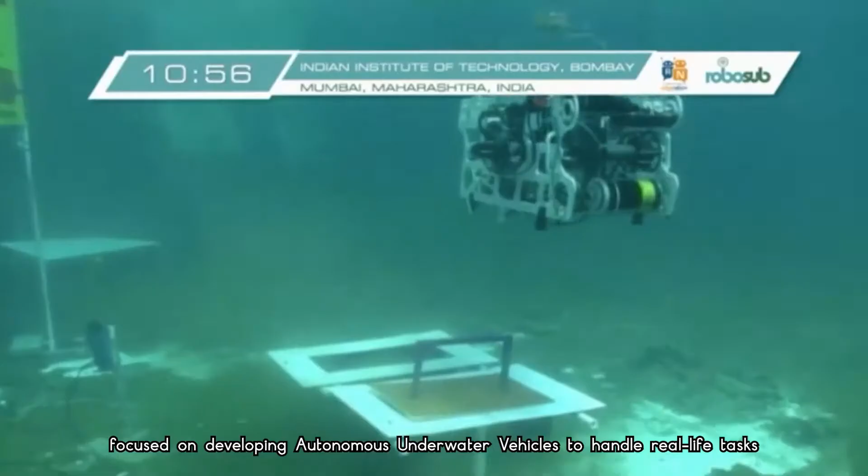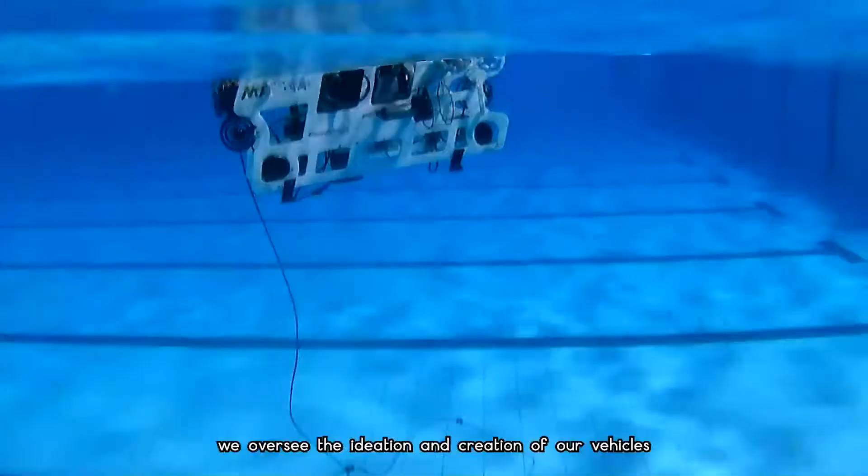AUV-IITB is a multidisciplinary team of 55 members focused on developing autonomous underwater vehicles to handle real life tasks. Through the consistent effort put in by members of our four subdivisions, we oversee the ideation and creation of our vehicles. Our flagship series is named Matsya, which is derived from the Sanskrit word for fish.

Hi, I am Sanjyoti Naran, a fourth year undergraduate from the Department of Electrical Engineering at IIT Bombay. I am the current team leader of AUV-IITB. Hi everyone, I'm Akshat Rajlat, a senior undergraduate student at the Department of Mechanical Engineering, IIT Bombay. I'm one of the current team leaders of Team AUV-IITB. Hi, I'm Mohan Abhyas, fourth year undergrad from Computer Science Department, and I'm one of the current team leaders.

Hi, I'm Nakul, a third year undergrad from Aerospace Department, and I am the Mechanical Subdivision Head. And this is the mechanical subdivision of the team. Hi, I'm Aditya, a third year undergrad from the Electrical Department, and I'm the Electrical Subdivision Head. And this is the Electrical Subdivision of the team. Hello, I am Andrew, a third year undergrad from the Electrical Engineering Department, and I am the Software Subdivision Head. And this is the software subdivision of the team.

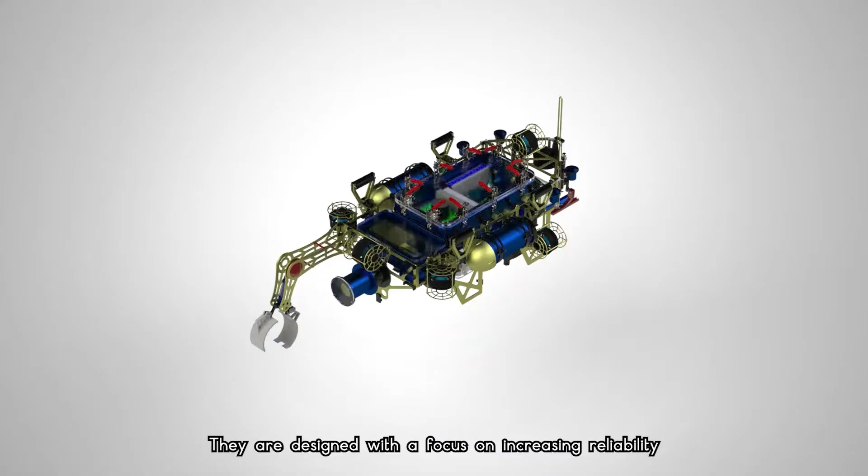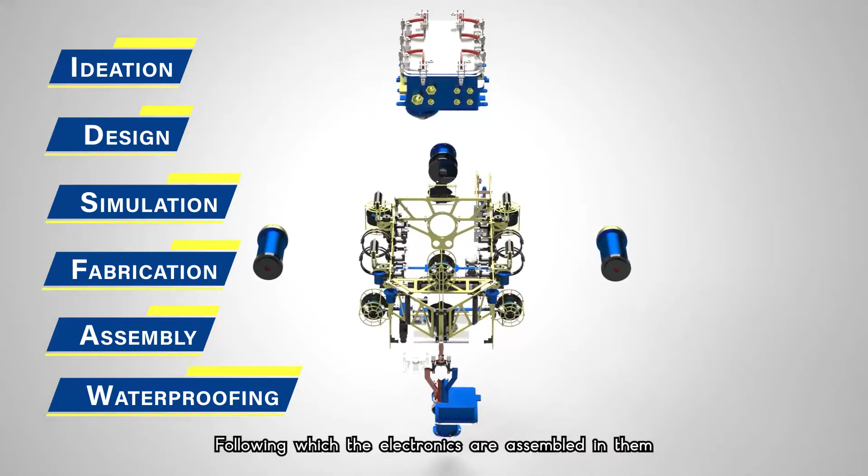Hulls are waterproof enclosures that house all the electronics, sensors, and other water sensitive components. They are designed with a focus on increasing reliability, modularity, compactness, and providing efficient heat dissipation. The making of a hull is a rigorous process consisting of ideation, design, simulation, fabrication, assembly, and final waterproofing, following which the electronics are assembled in them. We use a multi hull system with two types of hulls, namely cuboidal and cylindrical, for increasing accessibility and minimizing the chances of total system failure.

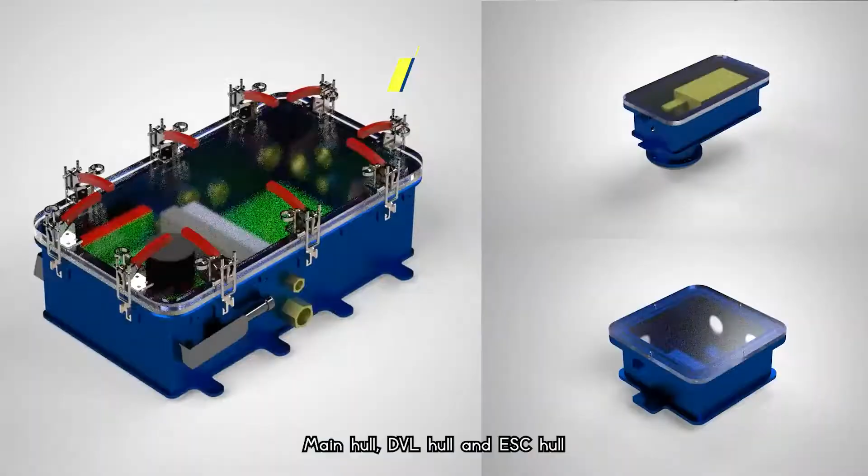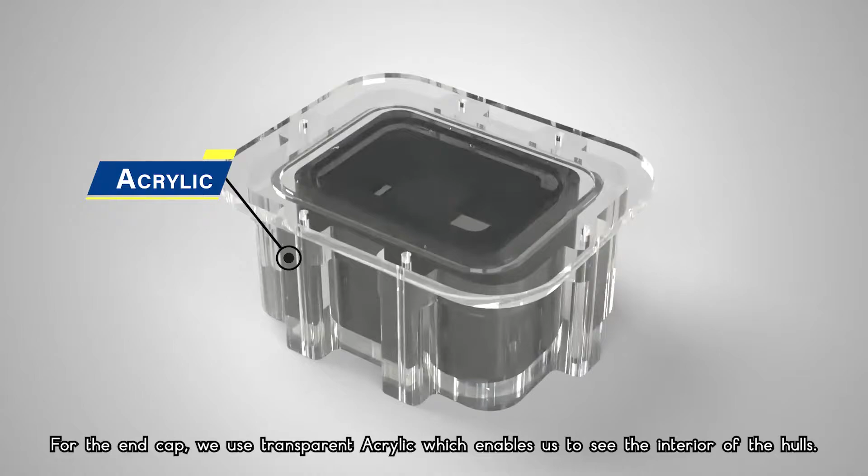In Matsya 6, we have three hulls which are cuboidal in shape: main hull, DVL hull, and ESC hull, and two hulls that are cylindrical in shape: battery hull and camera hull. Mostly we use aluminium alloys and acrylic to make the hulls. Aluminium 5052 is used for sidewall hulls as it has higher malleability, whereas aluminium 6061 is used for the base plate as it is much harder to deform permanently. The IMU hull is made purely out of acrylic. For the end cap, we use transparent acrylic, which enables us to see the interior of the hulls. For ensuring rugged waterproofing, all the hulls undergo vacuum impregnation, which is an industrial porosity sealing technique.

Let's start our journey with designing. When it comes to hull designing, noting down various requirements is the first thing to do. Requirements from mechanical viewpoint like stability, weight, depth rating, hydrodynamics, and from electrical perspective, modularity, accessibility of inner components, heat dissipation, ease of assembly are considered. Keeping in mind these requirements, we choose the shape of hull, following which a rough CAD is made.

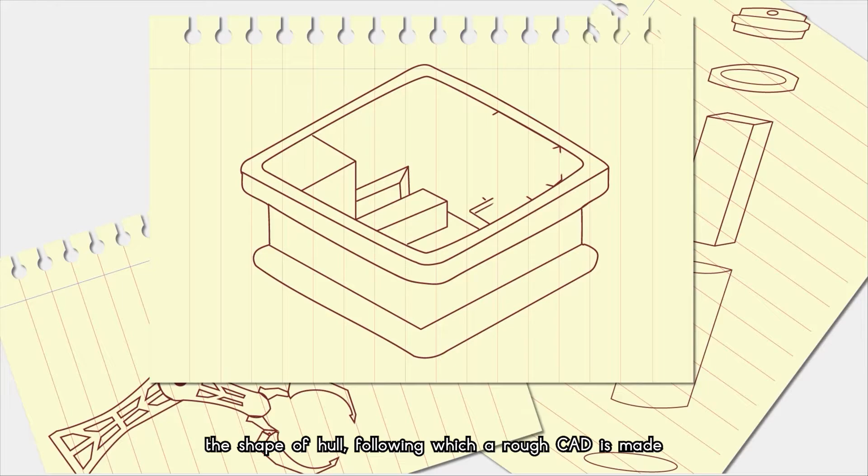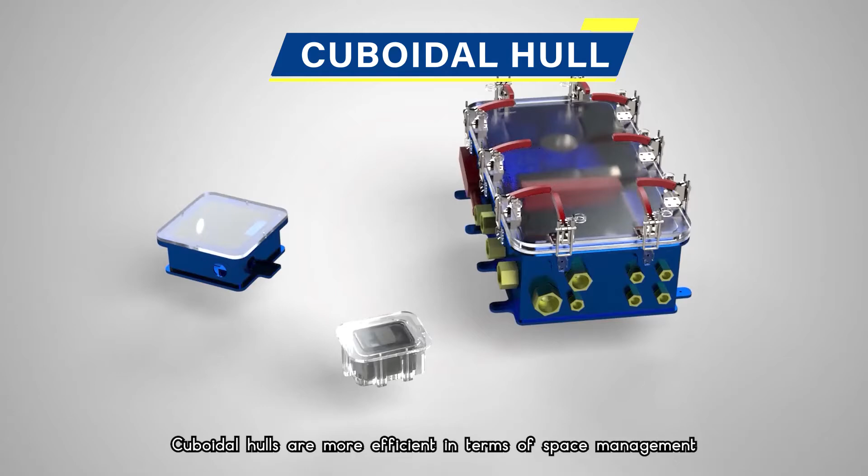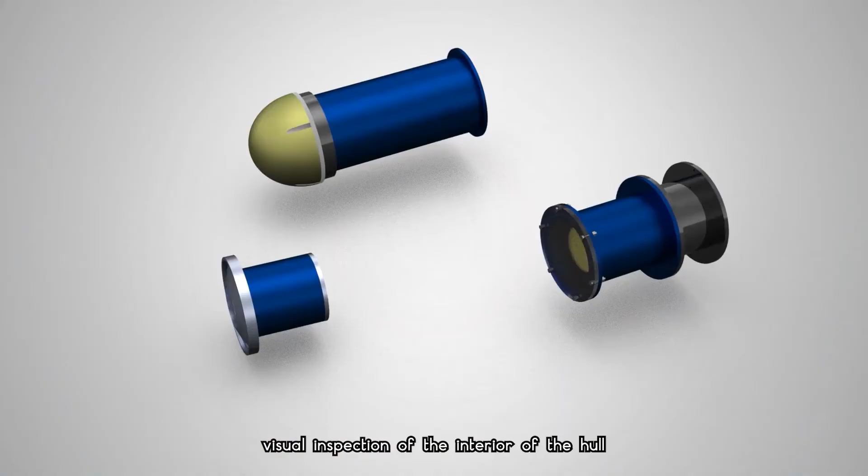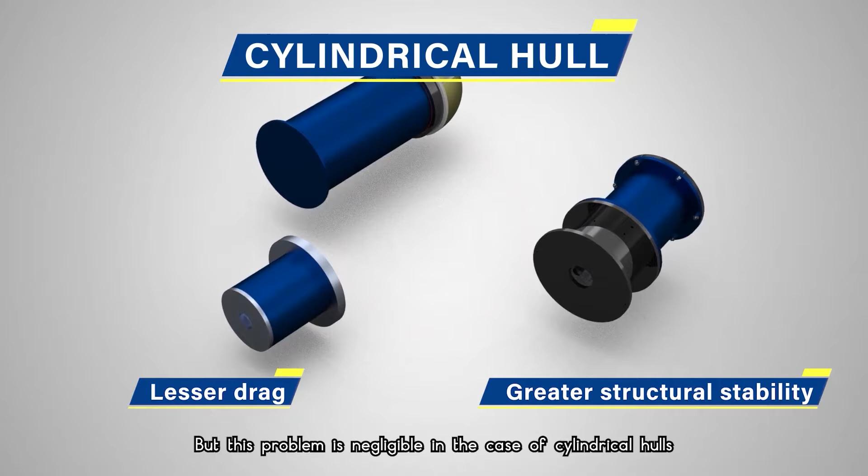We generally make hulls of two shapes, cuboidal and cylindrical. Both designs have their pros and cons. Cuboidal hulls are more efficient in terms of space management, offer a greater area to attach penetrators, and provide better heat dissipation. Moreover, we can also attach a transparent end cap to facilitate visual inspection of the interior of the hull. Cylindrical hulls, on the other hand, offer a lesser drag and have greater structural stability at higher depth. Cuboidal hulls may fail at edges and valves, but this problem is negligible in case of cylindrical hulls.

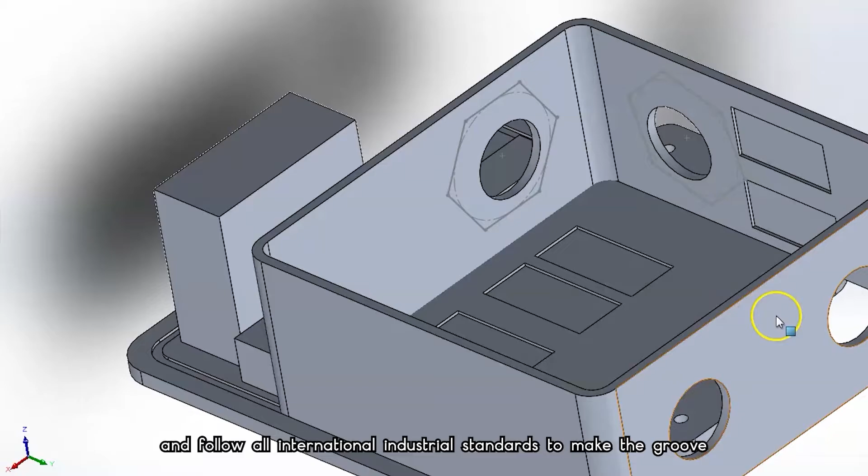Following designing, it's now time to make the CAD of the hull. After making a rough sketch, we move on to making a precise 3D model of the hull in SolidWorks. We use ISO 3601 certified O-rings and follow all international industrial standards to make the groove, thereby minimizing the chances of O-ring failure due to potential misalignment between the groove and the O-ring. Now we test the hull in the real world scenario by doing structural analysis.

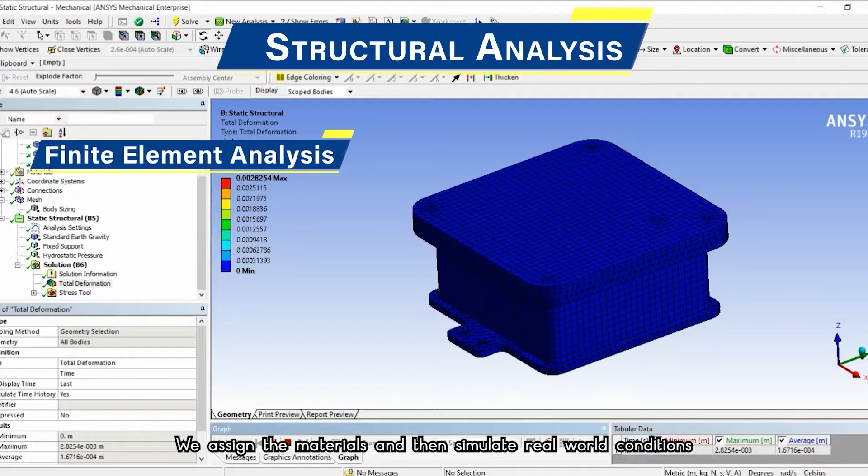Structural analysis. After CADing is completed, all the hulls are analyzed via the finite element analysis method in ANSYS. We assign the material and then simulate real world conditions. We then get the stress, the deformation, and the safety factor for the model. We ensure that the hulls have a safety factor greater than 1.5. If the safety factor is less than that, we find the cause of the failure and make necessary changes in the CAD, such as changing the thickness and adding supports until we achieve a satisfactory value. This ensures that the model does not fail in a high pressure condition.

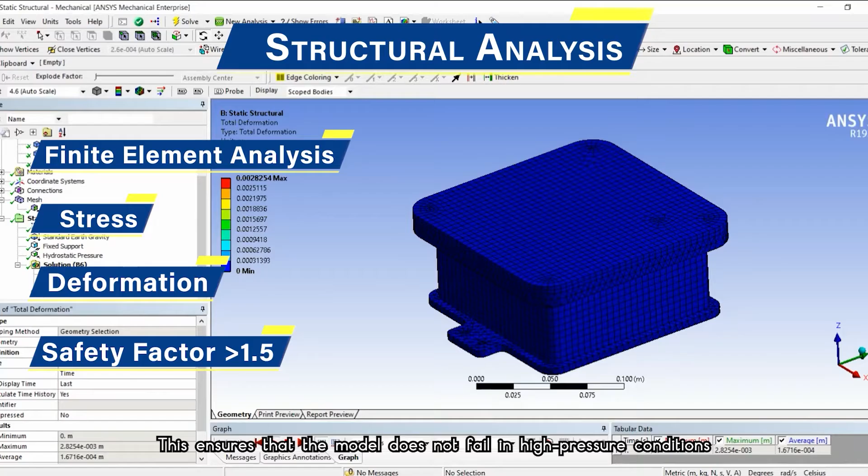All the hulls also undergo extensive linear buckling analysis in ANSYS to calculate the optimum thickness and the weight of the hull. Critical buckling load is calculated through load multiplier to ensure that our hulls don't deform severely or collapse. After examining individual hulls, drag analysis of the vehicle is done using ANSYS Fluent. Next up, we have CDR.

Once we are done with the analysis, an extensive critical design review of the CAD is conducted. In this, all our experienced peers in the team examine the CAD extensively for any shortcomings. If there are any issues, we reiterate the design by incorporating the necessary modifications. This process is inherently iterative, thus repeated until all requirements are met.

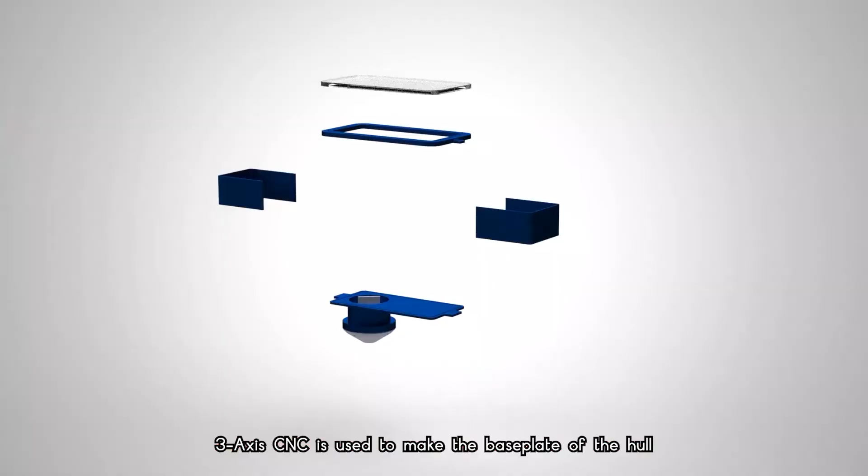And finally, we have the last stage, manufacturing. Once an iteration passes the CDR, we are ready for manufacturing. We use a variety of manufacturing methods to make the hull. 3-axis CNC is used to make the base plate of the hull. The side walls are manufactured by welding two C-shaped segments together. In case of cylindrical hulls, we directly procure annular cylinders of the required dimensions.

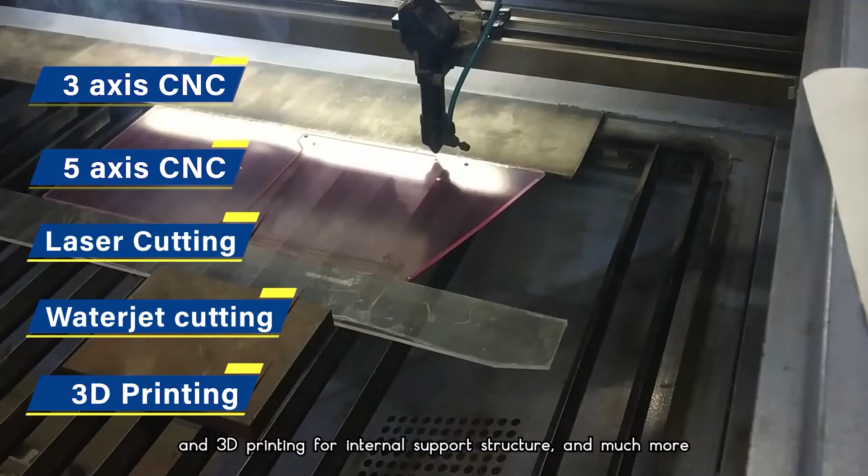We also use 5-axis CNC for making the flange and other complex parts. We use laser cutting and water jet cutting for making the frame and 3D printing for internal support structure and much more. Congratulations! Now you know everything to make your own hull.

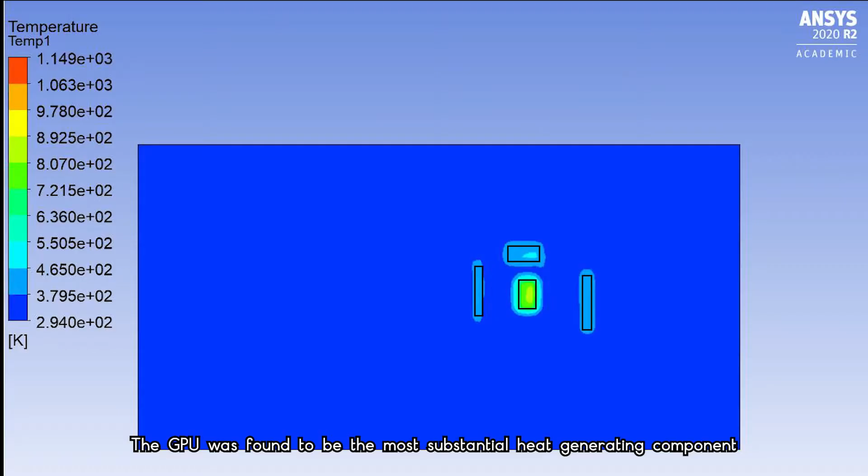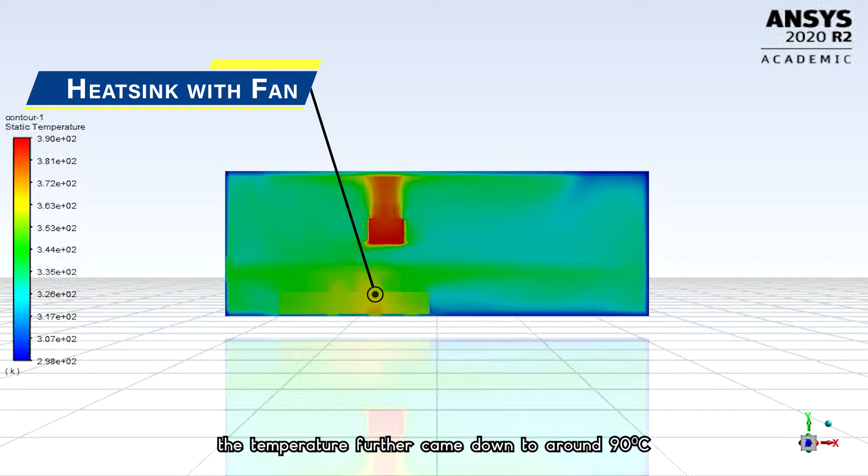Heating up of the main hull has been a major problem as it houses the components that generate a significant amount of heat. The GPU was found to be the most substantial heat generating component. We started with the model with no heat sinks and fans and found the temperature to be reaching as high as 630 degrees centigrade on the GPU chips. The temperature came down to 200 degrees upon placing a heat sink on the GPU chip. After the inclusion of a fan, the temperature further came down to around 90 degrees centigrade, similar to what we observed in M5 during pool testing.

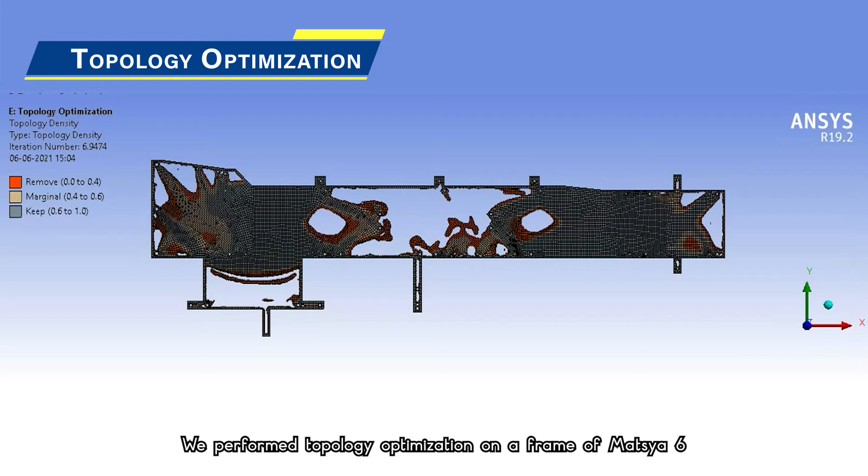Topology optimization is a tool to find the optimal shape for a given design space and set of loads and constraints. It's an effective technique to optimize a structural design and to minimize waste. Typically, our goal is to maximize stiffness while reducing weight. We perform topology optimization on a frame of Matsya 6.

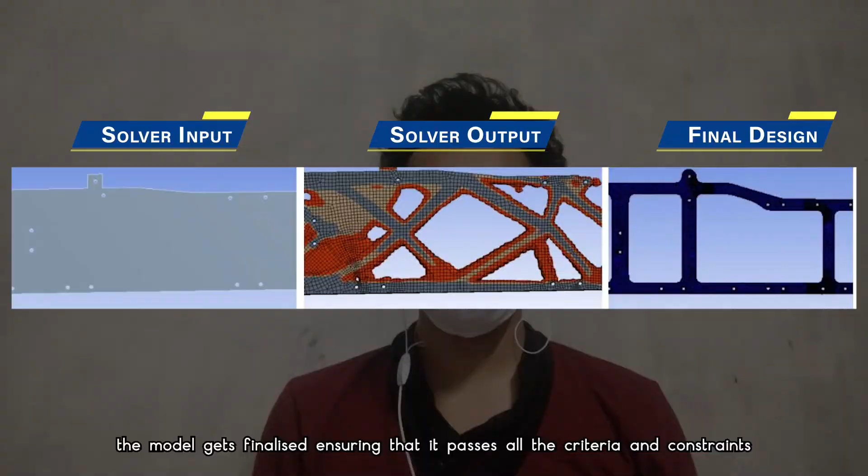First, static structural analysis is done and then linked to the topology optimization module of ANSYS. We performed analysis using compliance as an objective and response as maximum global von Mises stress. Convergence accuracy was set up at 0.1% and maximum iterations to 500. Once the validation of optimized design in static structure has been done, the model gets finalized, ensuring that it passes all the criteria and constraints.

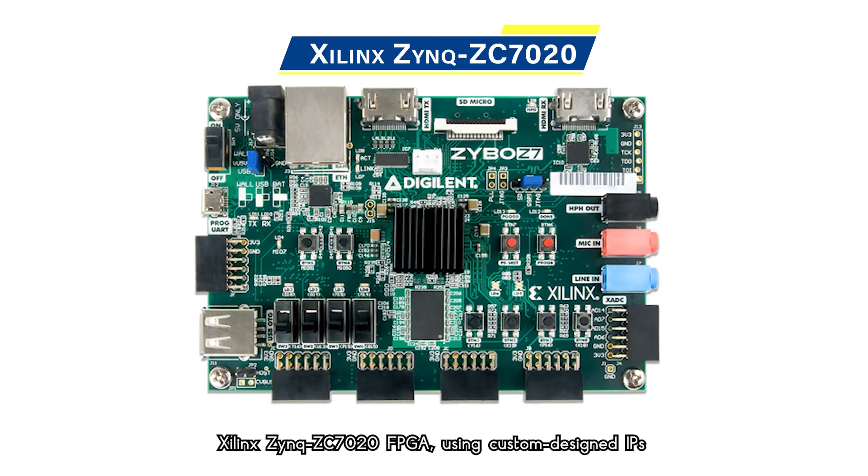Pinger localization on the FPGA. This project was undertaken to replace the DAQ for faster and more efficient localization of static underwater targets for the Pinger task. We had implemented the TDOA algorithm on the Xilinx Zynq ZC7020 FPGA using custom designed IPs. And by using hardware for real-time processing, we have reduced the load on our SBCs as well. The design and the implementation on the FPGA was successful in testing, and we have successfully replaced the DAQ.

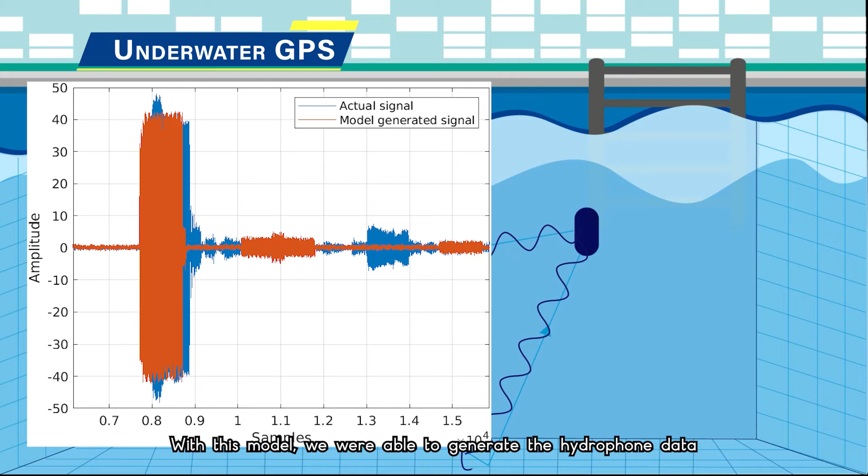Underwater GPS. An AUV can localize another AUV with an acoustic pinger and an array of 4 hydrophones. The pinger emits the ping in a swimming pool environment, created taking into account reflections, attenuation, and the Doppler effect. With this model, we are able to generate the hydrophone data comparable with the original data from RoboSub. We modified our current algorithm of pinger localization, adding real-time ping detection.

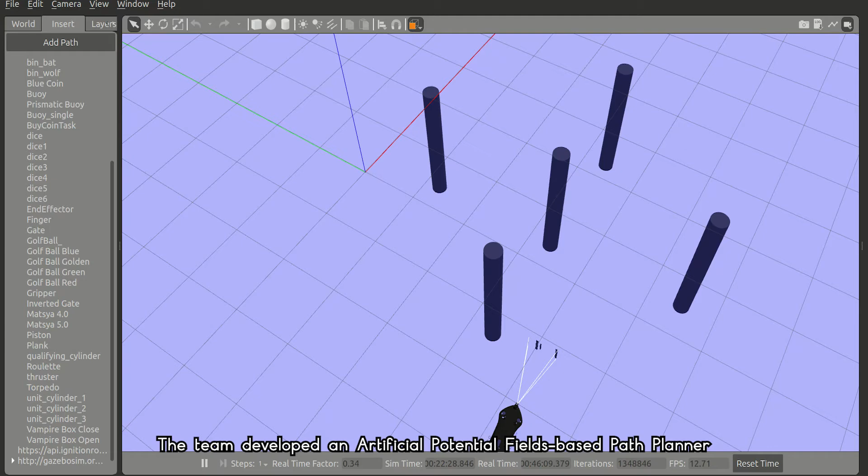Path planner and path follower. For effective obstacle avoidance in underwater environments, it was felt necessary to include a path planner module in the navigator. The team developed an artificial potential fields-based path planner that would return smooth paths for traversal through the RoboSub environment without the need to maintain a grid map of the domain. To aid the performance of obstacle avoidance, we integrate our path follower module, which fits splines to the given set of points and feeds targets to the controller. This module has been tested extensively in the simulator.

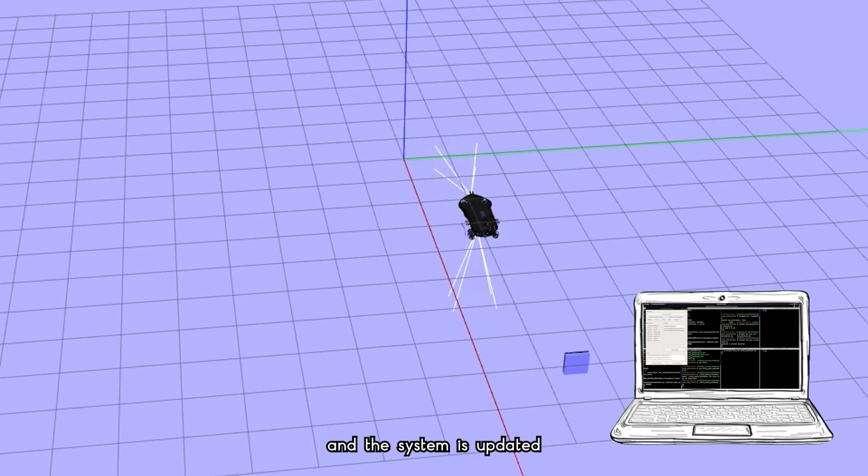In case of an unexpected shutdown of the vehicle, a system of logging data was implemented so as to resume operation from the same point. These logs are then parsed for the data and the system is updated with the memory of what was being done prior to the shutdown.